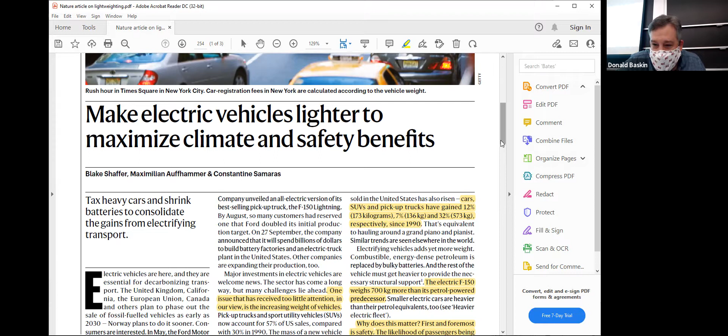The article is written by an economist, so this is not an engineering article. It's not going to talk about the wonders of carbon fiber or titanium corrosion resistance or anything like that. The article really kind of equates lightweighting to societal costs—how much does it cost in terms of people, in terms of climate change, floods, etc., to stick with such heavy cars?

Morning, Tyler. There's some interesting things in here about cars like sedans and little coupes—they've increased in weight by 12% since 1990, and for pickup trucks they've increased by 32%.

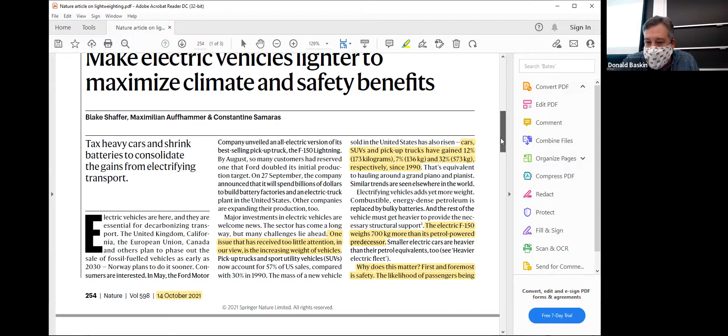The authors are saying that when you go electric, it's a problem because the vehicles become much heavier. So he takes the Ford F-150 pickup truck—Ford recently announced they're going to come out with an electric version, I think they're calling it the Lightning. And the vehicle is 700 kilograms heavier than the gasoline version. So that's a big increase.

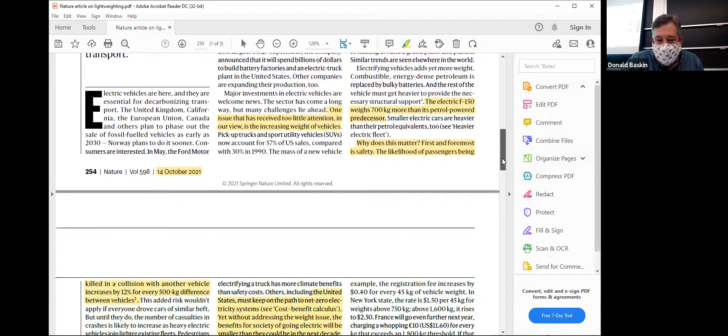There's similar percentage increases with cars when you go from gasoline powered to electric. And they go on to equate those increases in weight to costs for people getting killed—if, in an accident, there's some relationship they've drawn between the mass of the vehicle and the likelihood of somebody getting killed in an accident, or a pedestrian getting killed.

Then they talk about the effects of weight causing more particulate matter in the air because of tire wear, which is an interesting point. When you drive your car down the road, little pieces of rubber come flying off. Most of the time you don't see them, but tiny pieces stick to the road. Apparently there's a nonlinear relationship there—as you get heavier, you get disproportionately more particles spewing off your tire onto the road.

And then they talk about the idea that there's more material in the vehicle, there's more energy that goes into making those materials, and therefore, in some instances, depending on what you're burning, you'll actually negate the advantage you get from using an electric vehicle because of the increased mass.

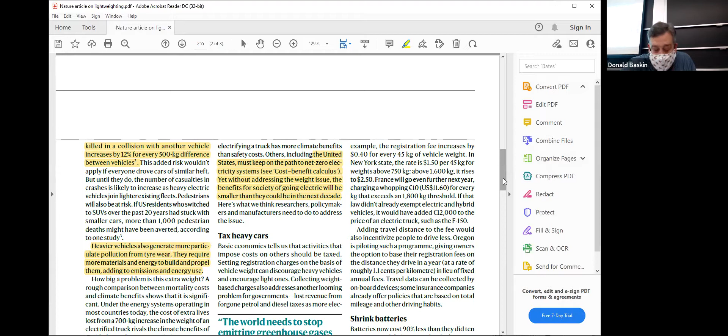So he challenges the US government and the auto industry to start thinking more in terms of lightweighting. They talk about taxing vehicles based on their weight, which apparently they already do in New York State and in Oregon—I didn't know that. And then there's a nice graph showing the relative weight difference between electric vehicles and gasoline powered versions of the same car.

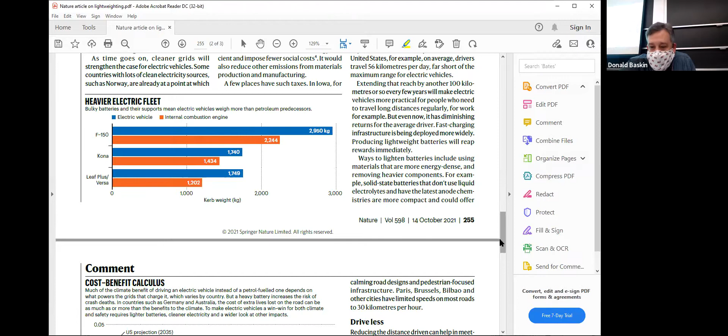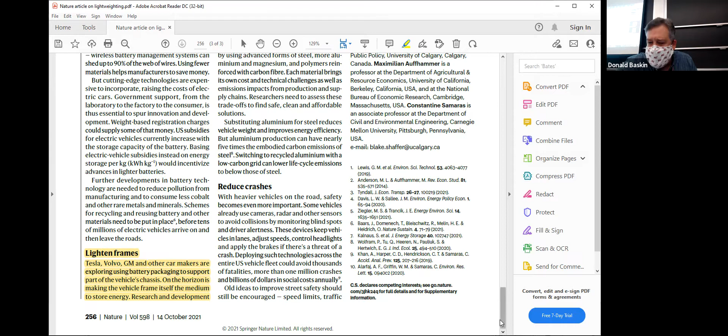He talks about lightweighting frames. So that's what we're talking about here—one of the ways we can mitigate this problem is to make lighter vehicles. I wanted you to see this article just to understand how germane lightweighting really is, and there's things you'll probably learn here that can really go out and help the world. So just think about that for a second, okay?

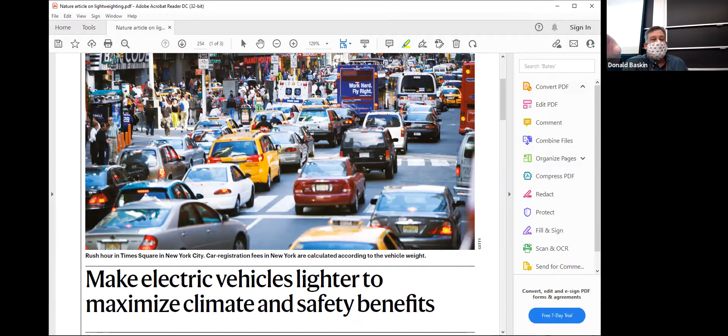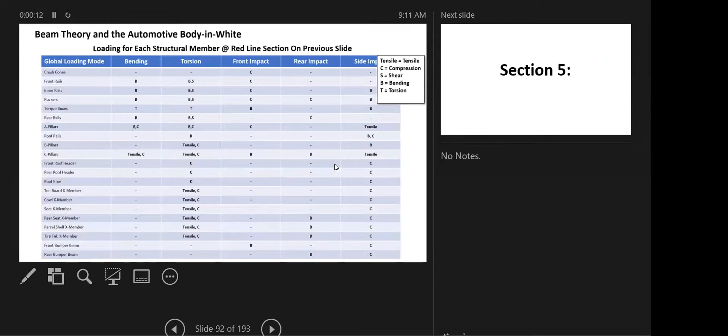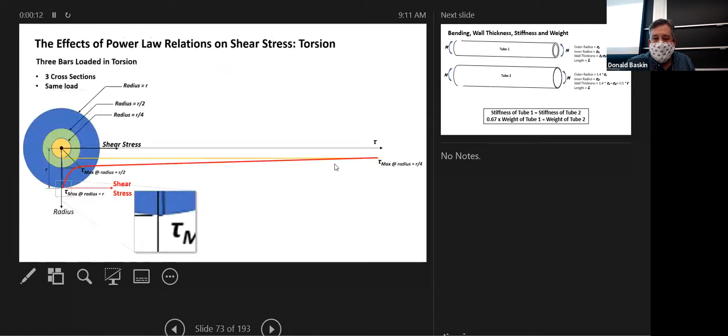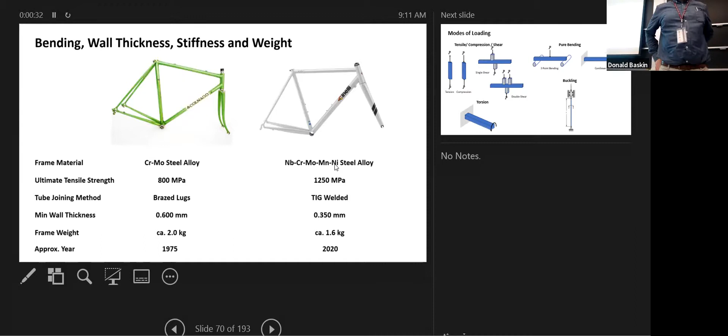Just to take a step back, what we talked about last time: we compared two bicycles. I said these bicycles are both made out of steel, yet one is significantly lighter than the other. How did that happen? It happened because it took advantage of both materials improvements and geometrical improvements.

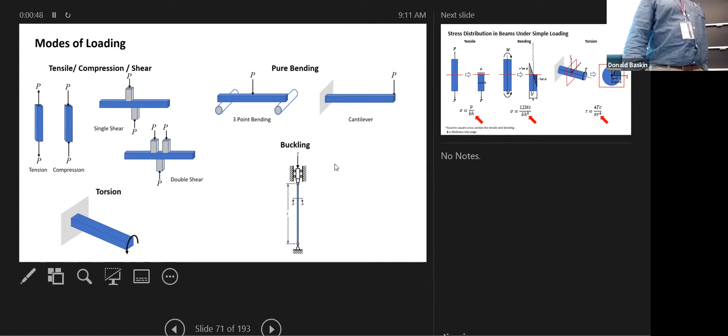We talked about the modes of loading. There's tensile, shear, double shear, buckling, bending, torsion. And we talked about how when you have these different modes of loading, how the stress is distributed across the cross-section of a beam that's in one of those modes of loading.

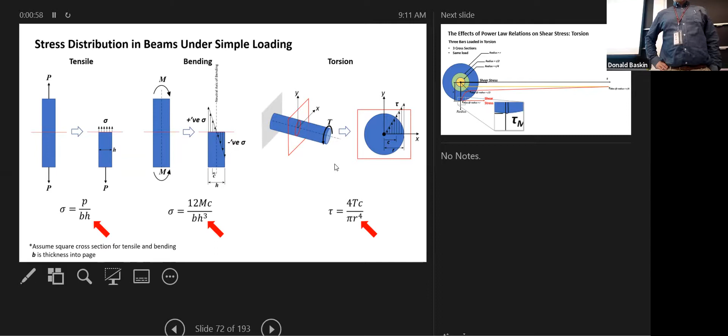We realized that we could use that distribution of stress to our advantage to increase or at least maintain the stiffness or strength of a beam, but at the same time reduce weight. We do this when things are under bending or torsion or buckling by growing the outer diameter of the part and then thinning the wall. It's a tube. And that's exactly what they did in those two bicycles: they went to a bigger diameter and they thinned the tube out.

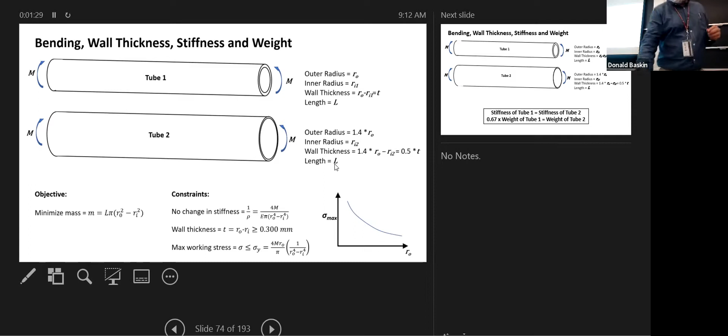And we talked about these constitutive laws of mass savings. There's equations that I came up with, no fancy derivation by any stretch, where you can plug in different values of the material's stiffness, density, strength, Poisson's ratio, and begin to estimate the relative mass savings compared to using different materials. This has to be under the context of the mode of loading and whether you're designing for stiffness or for strength regime. Sometimes when you're designing a part, you'll dimension it so that it meets a certain strength, that's your requirement, and sometimes you'll dimension a part to hit a certain stiffness.

Robin was telling me before you guys got here... My background is in civil structural engineering. A huge amount of buildings is also governed by stiffness rather than strength, especially floor beams. Floor beams, how many there are and the spacing between them, is all based on deflection, because humans get really freaked out if a floor is bouncy. It's literally based on comfort. All of your floors could have maybe up to half of the material they currently have, but you'd move every time you walked on it, and people aren't a fan of that. Even sitting on a bridge, an overpass, when a truck goes by and things bounce. This morning I was waiting where you go from the Pike onto Storrow, there's that horrible off ramp, and I'm sitting there and things are bouncing. It's unnerving. People don't like that, but it's actually safe.

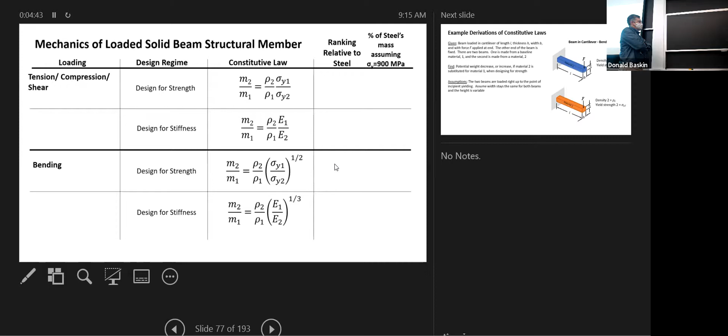If you're loading it on top and then bending, you only need rebar down here, and all of this concrete does nothing. It just transfers the load. You use this for compression and this for tension, that's it. All of the concrete in here is just to hold the rebar to the rest of it.

Light weighting is only important in this case as much as it relates to money and natural frequency. More material is more expensive. Money's the biggest bit, and then you want to get into environmental. So I've seen bridges that have a cross section that kind of goes like this, because you don't need much cement down here, I guess, right? Yeah.

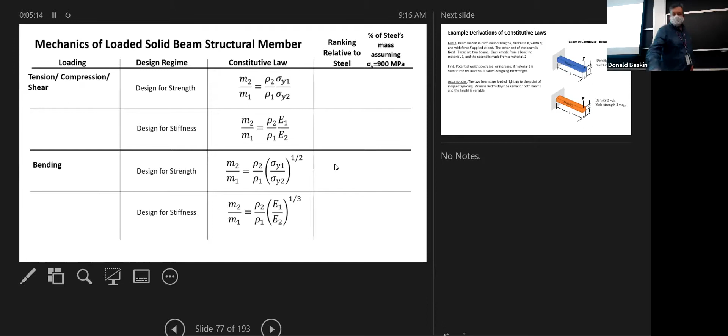We derived, or I told you guys you could go back and look at this if you wanted to, derive the equations for these constitutive laws. You can derive this fairly easily. The derivation is in here really only to show you guys, if you find something you want to try on your own, some loading condition, you can do the same thing.

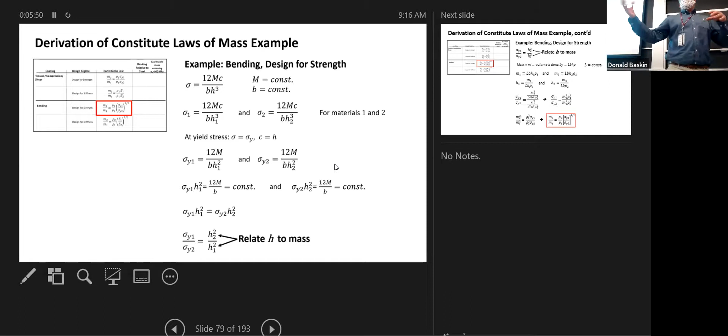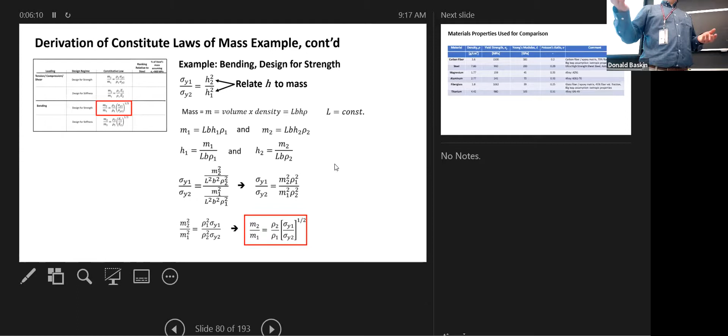So you know how the calculation goes, but it's pretty simple. If you write out the equations of, in this case, bending and strength, and then you have that for one beam and a second beam of different materials, you can equate those together, cancel things out, and have a combination of the H's, the thicknesses of the beams. Then you can relate those H's to a mass of the beam through the easy geometrical equation for mass, equals volume times density, basically, and you can just solve this through.

It's pretty easy stuff. We plugged in properties for different materials to see what would happen, and the big surprise that came out of this is that sometimes you can actually design things lighter out of steel because it has such a high strength. That was surprising. Everyone always jumps to aluminum or magnesium when they want lightweight. They don't think it's steel, but sometimes you can actually do lighter with steel.

And this is when you have things that are loaded in tension or compression or shear, not necessarily for bending or torsion or buckling, but for just simple tensile or compressive loading. Sometimes you can make a lighter structure out of steel.

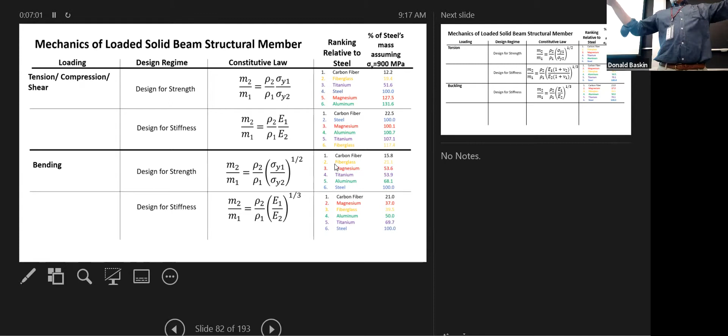We talked a little bit about packaging, that even in bending, sometimes you're assuming you have enough room for packaging so you can grow the outer dimensions of a structural member. We talked about door inner beams where there's not enough room to package a big beam, so you can't make that out of aluminum, even though it's in bending, and have a weight reduction. So they're often just made of steel because you're interested in absolute strength and you're very constrained as far as how much packaging space you have to put the beam.

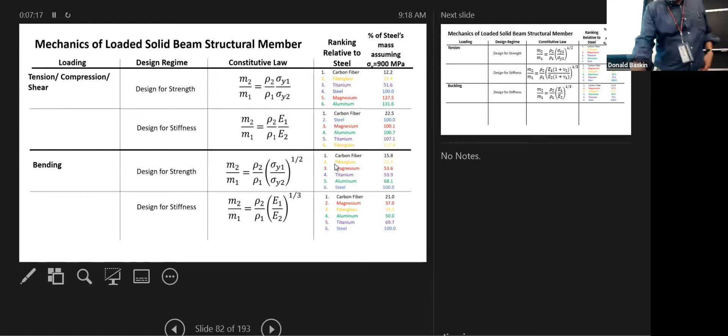We talked about a little bit about Ashby diagrams. Ashby diagrams are just a graphical representation of the constitutive laws of weight savings.

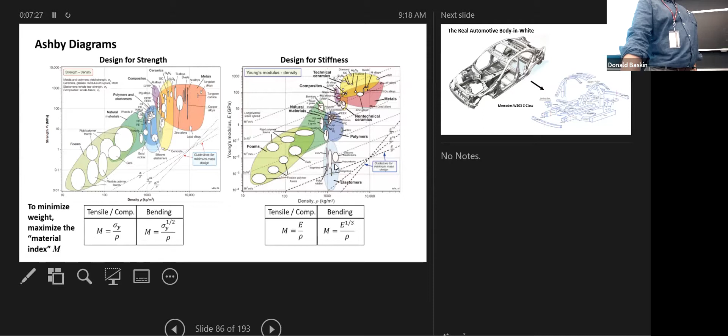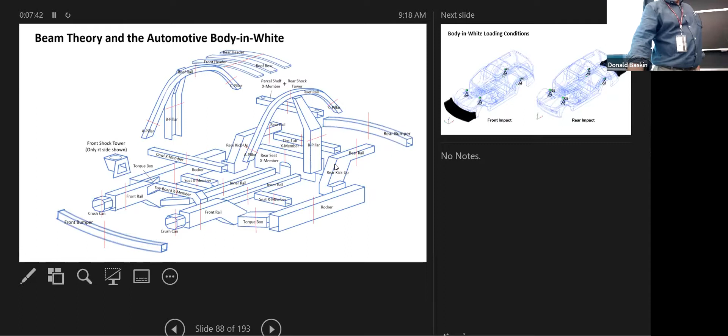We talked about body structures of real cars, that you can break the body structure of a car, if you think about it, into a series of beams, hollow beams, and then under different loading conditions. So for the whole vehicle, front impact, rear impact, bending, side impact, torsion, you can begin with finite element analysis or just through intuition to assign different modes of loading to each of these different beams in the body.

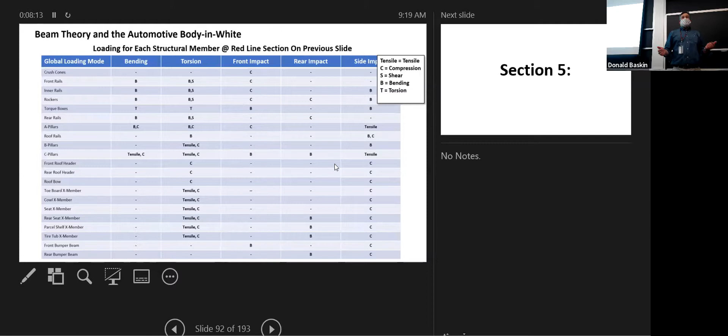And then you could say, wow, this one's only under compression. This one only sees tension across all these different loading conditions. Therefore, making that part out of aluminum or magnesium or carbon fiber would probably be a waste of money, and I can make that part lighter and cheaper if I make it out of steel. Don't always negate steel, okay.

Any questions on last week's lecture?

Guys, everything good? Okay, so last year was the 2020 annual meeting for Tesla, what they called Battery Day.

Anyone watch it? It was a lot of fun. It was a lot of fun. I always enjoy watching Elon Musk. He's so articulate.

Interestingly, they talked a lot about light weighting in this annual meeting for investors, which is surprising because usually they just talk about financial things, but this time they decided to call it Battery Day. They talked a lot about light weighting and metallurgy. Elon Musk talked about batteries and how to make them smaller and lighter. There's a couple of things here that were interesting, I thought.

He talked about making the body structure out of single piece large aluminum castings. In fact, Tesla has invested in the largest aluminum die casting press in the world, the Gigapress. They developed new alloys that didn't require heat treating and still had sufficient strength.

So typically, like we talked about in the first couple of days of this lecture, we talked about precipitation hardening. We talked about how you go from making aluminum, say, a 30 KSI material to a 60 KSI material by heat treating it. So when you injection mold something or die cast a big aluminum part, traditionally you've had to heat treat that part to get the strength out. You have to solution treat and artificially age it.

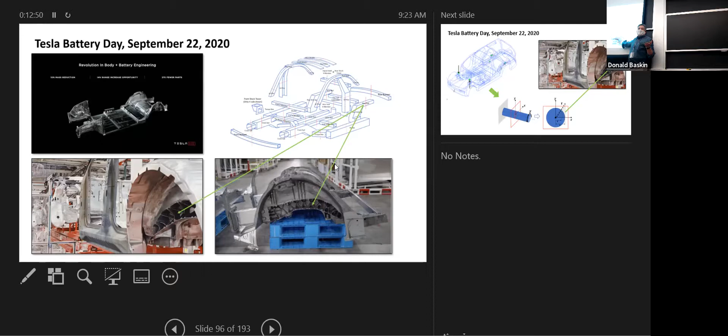So they probably did this because of the way they cast the part - I don't exactly know what they did, but they cast it in some orientation where probably they have to take the mold out, and if it were closed off, they might be die locked and not be able to get the part out. So I'm sure the engineers at Tesla thought about this and had a compromise to make this part out of aluminum. But every engineering design has some compromise, always, you'll never make a perfect part. But it's interesting to see what their compromise was, that they would open this up like this.

To take away some of the strength and stiffness. Robert, do you know what the strength is? I do not know that. And he did talk about it - Google it, yeah. Do you know what it's called? I don't know what they call it. He's probably got some snappy name for it, like all his products, it's got a snappy name - the Gigafactory.

I'll see if it comes up quickly. You might, it might help if you look at new aluminum alloys, like the Tesla Model Y.

It's in megapascals. What is it in megapascals? 175 megapascals. So you want to think in KSI. That's the yield strength, not the ultimate. 175... that's 25.4 KSI. That's pretty good, because 6061-T6 is like 35. So that's not bad for casting.

I've seen some of the other casting alloys, like A356, that are nowhere near that strong. So that's not bad actually. Put this in reference, guys.

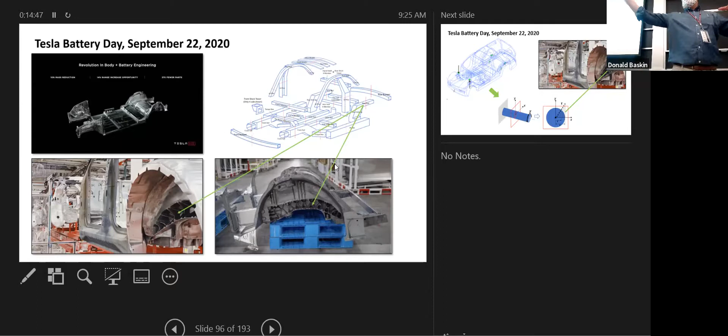This is an explanation of that. It's interesting, he talked about this that day. He also talked about using the battery pack as a structural member, and even a step further, using the individual metal cans that make up the battery.

The battery is like a metal can, and there's what they call the jelly roll of anode, cathode, and the jelly in between. They stick that down in the can. So there's a steel can, and basically the steel can stops the chemistry from leaving the cell, and stops intrusion into the cell that could cause shorting.

So it's got to be pretty strong when we make those out of steel, but they're heavy, right? So Musk talked about using those as structural members.

So if you think about it, here's the front wheel, here's the rear wheel. You've got this battery pack in the center of the vehicle, and a roof that comes up over here, and comes up here too. So this whole thing, when you hit a bump, for example, is under bending.

So that means that to some extent this is probably more under a tensile and a compressive load, depending on which direction it's bending. But maybe because it's got some thickness, it's under bending on its own. The battery pack is under bending on its own to some extent.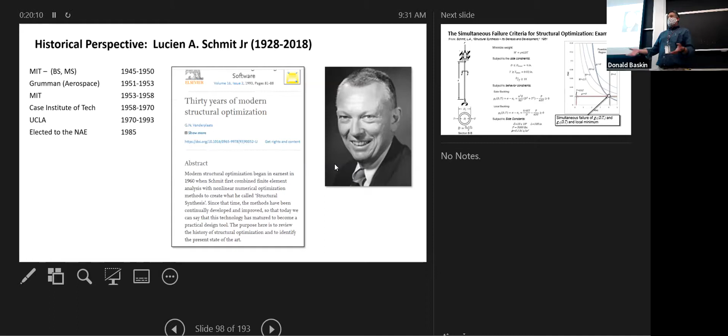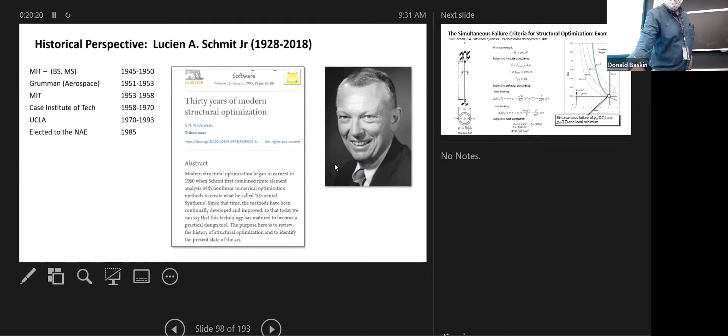But he wrote several landmark papers in structural optimization. The reason I'm showing you this information is if you want to learn more about what we're talking about here, I encourage you to go to the library and look up some papers from this guy, because some of the papers are really fun to read. They nicely explain how you search a design space, a new term for you guys, to find the optimum solution for stiffness or strength or fatigue or natural frequency or whatever. Go look this up. He's got some great papers in the library, and they're pretty fun to read.

Here is one of the examples in one of his papers. This is from a paper he wrote in 1981. I think he did a lot of structural optimization work for NASA, so I guess he got a lot of his funding from NASA. Most of these examples in one way or another relate to some type of spacecraft or satellite or something that needs to be strong and stiff.

Okay, let's see, I'm going to try to draw this. Here you've got a column, a tube, and it's under a compressive load. It's going to fail by either global buckling first or local buckling first. This thing has a diameter of D, a wall thickness of T, and a length of L.

The goal you're after is to minimize weight. There's an equation, a pretty easy equation, that calculates weight as a function of density and the dimensions of the tube. Pretty simple stuff, right? The variables you have to work with are the diameter of the tube and the thickness of the tube.

So I want you to start thinking in terms of design spaces. We mentioned this a little bit in the materials part of this lecture, where the design space was made up of percentage moly, percentage chrome - that's a perfectly valid design space for metal. In this case, we're dealing with...

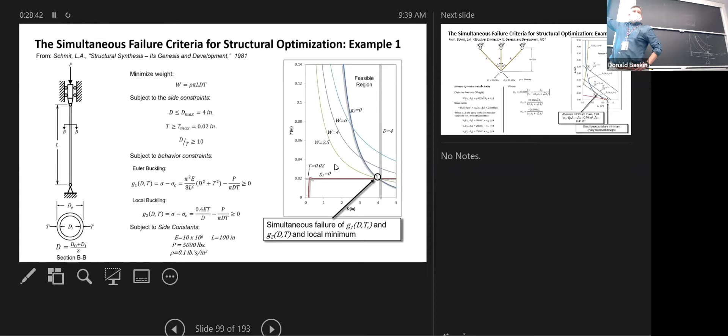You've broken the constraint. Local buckling is that tiny red line on the side? Yeah, it's this tiny red line that goes like this. Does it follow along with the T equals 0.02? Probably not exactly, but pretty close—it probably has some curvature in real life. I've drawn this by hand, so I didn't draw this on Excel, but it's probably pretty close to following the 0.02 line. What I did is take this paper, scan it, and trace over it in PowerPoint—that's how I get these graphs. It's tedious, but it's readable that way. It might be better to do this in Excel next time, to draw the functions in Excel.

So we're going to go back here. Okay, no questions about this? Okay.

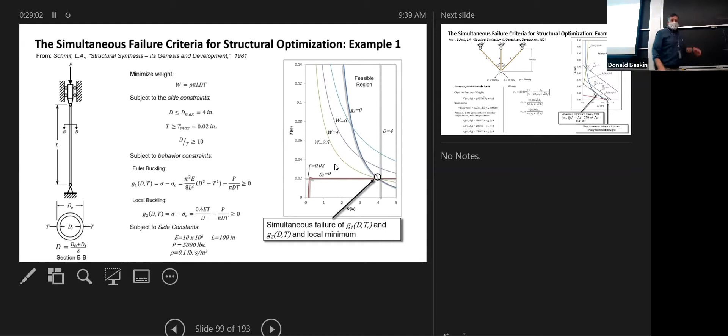Here's a more complicated example—this is actually famous. This is the 3 beams for a spacecraft, some type of satellite or something, I can't remember what it was. You have fixed points up top, and you have 3 beams connected at the bottom. There's some loads, P1 and P2, which are roughly symmetric. You know that the diameter of A1 and A3—so A1, A2, A3 are the diameters of those tubes. N is the distance from the connection points at the top to the connection point on the bottom, and you have the angle between them. So it's a pretty simple geometry problem at this point.

Rho is density. The objective function is to minimize weight. The design variables, since you simplify this by saying A1 equals A3, can make this a function of only A1 and A2—it's a lot simpler if you use that symmetry. So the weight is a function of density, of that length N, and of the diameters A1 and A2. It's very straightforward to calculate out stress—stress is sigma ij, where I is the structural member and J is the applied load, P1 or P2. You write out the equations for the stress. You know that this material is only good up to 20,000 PSI in tension, and negative 15,000 in compression.

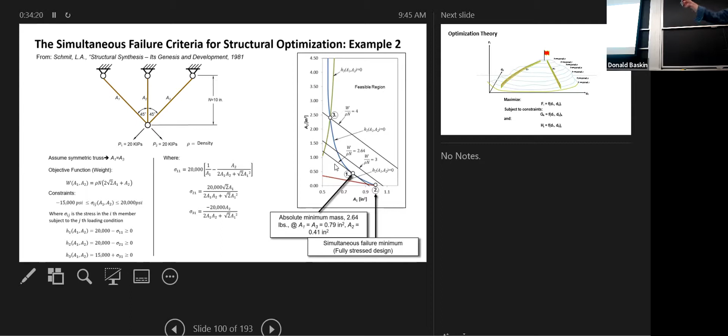Here's an example—this is a kind of an interesting example where you can see it's actually advantageous to make one tube a little bit thicker.

Does that make sense, guys? Okay.

So here's sort of the generalization of this problem right here—this numerical optimization problem. You've probably seen this before. We'll go over it for fun. You have a mountain.

The mountain is representative of some objective function, f. You want to maximize the function—you want to get to the top of that hill. That's where f is going to be the biggest. But you have some constraints.

There's snow fencing on both sides of the mountain, and if you're walking up this thing blindfolded, you can't go past the snow fencing. So suppose you're blindfolded, you can't see anything, you've got a good blindfold, and you have to walk up this mountain, okay?

But you don't know beforehand where the top is. So somebody drops you off there, they spin you around, they get you disoriented, and they say, find the top of the hill.

So you start walking in one direction, and you feel like you're going up. That must be good. You're going up, you're going up, you're going up. You keep taking one step. Maybe you take the same step with your feet, one step, two step, stop, one step, two step, stop, reevaluate. Eventually you walk into the snow fencing. You go, oh, I can't go any further in this direction.

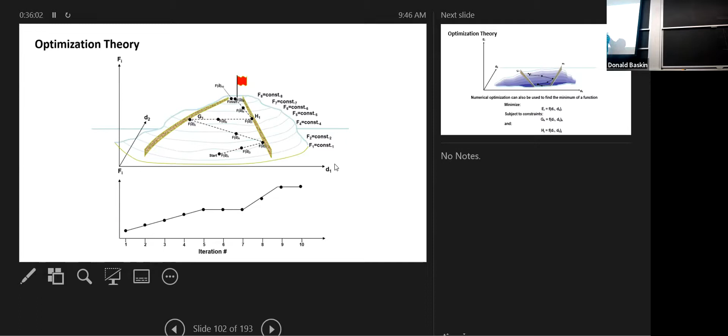What do I do now? So you switch directions and you move forward and you say, do I still feel like I'm going up? Yes or no? Okay, I am going up. So you start heading a little bit further up, keep walking, maybe you take bigger steps, smaller steps, and eventually you run into another piece of snow fencing. And then so on. You switch directions again and again and again until finally you get to some point where if you walk any different direction, you feel like you're going down. That is the local maximum.

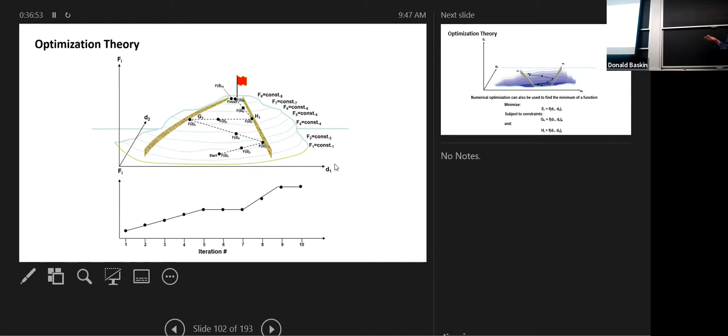So this is very much like when you have some formula that maybe represents weight, or represents stress, or represents natural frequency. It's a complicated equation. You don't know, you're totally disoriented. You have no idea what's up and what's down, how you're going to increase or decrease that objective function. And even more so, you don't really know beforehand, intuitively, where the constraints are. That's what you're doing here. That's really, as a mathematician, a person who thinks in terms of numerical optimization or studies that field - you don't know where you're going. You're blindfolded on a mountain trying to find either a maximum or a minimum.

So we're going to play a game. Okay, we have this equation, it's f of x. It's some objective function. This might be weight, this might be natural frequency, it might be money - how much is this thing going to cost? We want to minimize cost. Could be a lot of things.

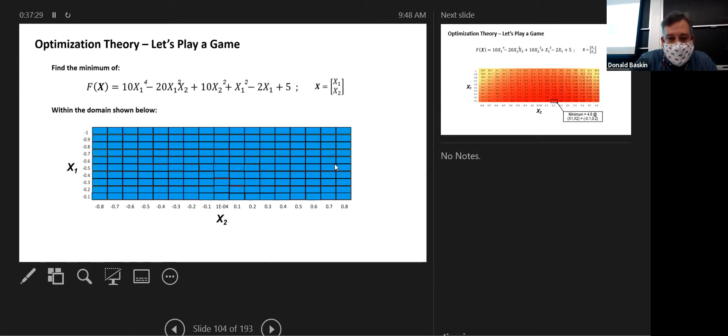And we're gonna search this design space and try to figure out - you guys are gonna know - we're gonna try to figure out where the optimum of this equation is. So somebody pick a spot in this design space of x1 and x2. X1 and x2 are two variables. F is a function of x1 and x2. So these x1 and x2 could be the diameter, could be the thickness, it could be the length of a tube or a structural member, it could be a height in a tube and bending.

So you're trying to find out - you're blindfolded, basically, looking at this. You don't know where up and down is. So the way a lot of numerical optimization works is they just pick a random point to start off somewhere. So somebody pick a point on here. You want to start here? Zero, roughly. Actually, I did this in Excel and put in zero - it blew up. So you want to pick this point right here? Okay, I'm going to delete that point.

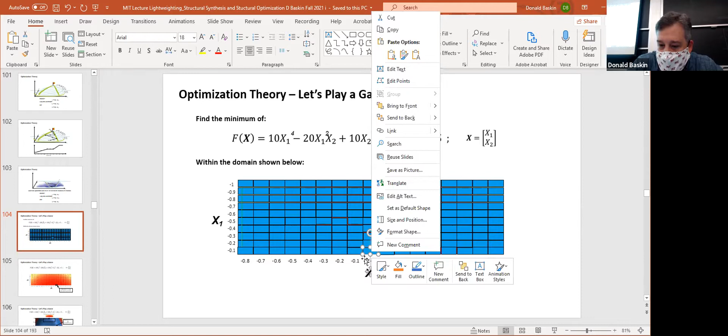Okay, so the value of f of x at that point is 5.1. I'll tell you right now, we have no idea what x1 is - no, x1 here is 0.1, negative 0.1. So this is your design space, x1, x2. I'll tell you right now, this is not the minimum of the function. But what direction do you go next?

You can go up, down, or diagonal either direction. You can go left, right, up, down, diagonal. You want to go up? Okay, so you want to go right here? You want to step one, or you want to step more than one? Okay, you want to go to here? That one? Okay, 5.9, 5.9. So you went the wrong direction. You're trying to minimize f of x, you're trying to find the minimum value of f of x.

Upper left corner, here? You guys want to go here? Okay. Ooh, you're much higher, 30.9. You want to go over here? Here? 34.1, even worse.

Christine, you want to go to the bottom right corner? This one - my right or your right? Okay. You're at 9.52, so that's better. For you guys - bottom left? Okay, over here? 12.7, you're worse off.

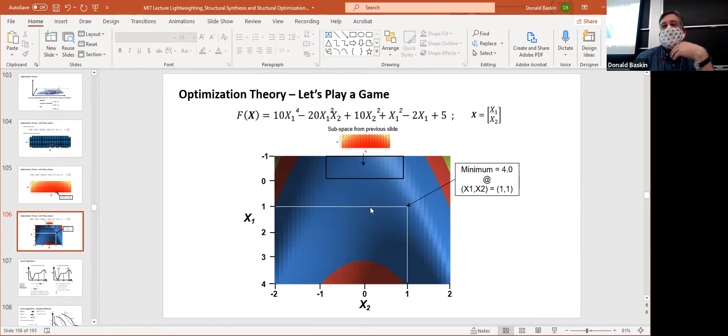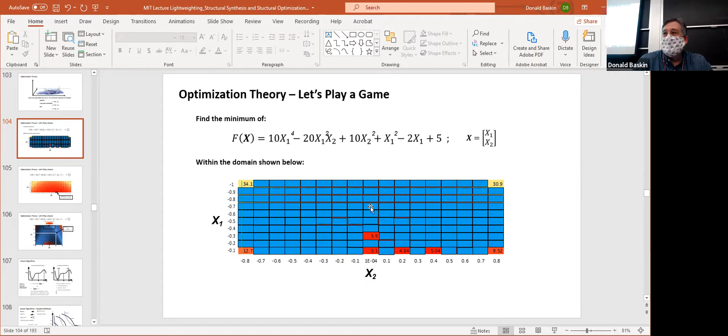Eventually, I told you this is where the minimum is, but you got pretty close, right? I think Robin, your first step was the closest we got. Oh no, we got closer over here, so x2 equal to 0.2. So think about this, guys - this is really what you're doing when you're doing numeric optimization. You're searching in the dark without a flashlight, and you're using that to help guide you.

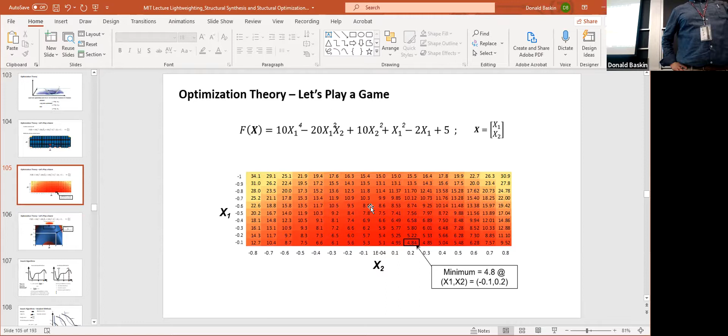Then you take the second derivative and determine if it's concave up or concave down based on the sign. If it's concave up, that's a minimum. If it's concave down, that was a maximum. This is first year calculus - not a big deal. Things get difficult when you start constraining a problem, because your minimum and maximum aren't necessarily going to happen at a place where the first derivative would equal 0. This is where the mathematics community has developed some wonderful tools and methods to help you find local maximum, local minimum.